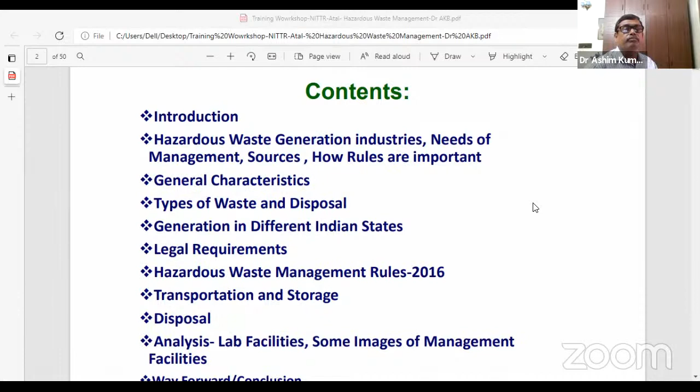Then the most important aspect is the legal requirements, because every industry must follow these legal requirements. Then the most latest hazardous waste management rules 2016 under MOEF. We'll discuss this rule, the basics of hazardous waste rules 2016. Actually it was generated in 1989 and the latest amendment was made in 2016.

Then transportation and storage, then disposal, and lab facilities required for characterization or analysis of the hazardous waste, then some real-life pictures of the management facilities—how the waste are managed, how the waste are transported. So some real-life images of the management facilities, then way forward with a conclusion. This will be our entire coverage with respect to my lecture on hazardous waste management.

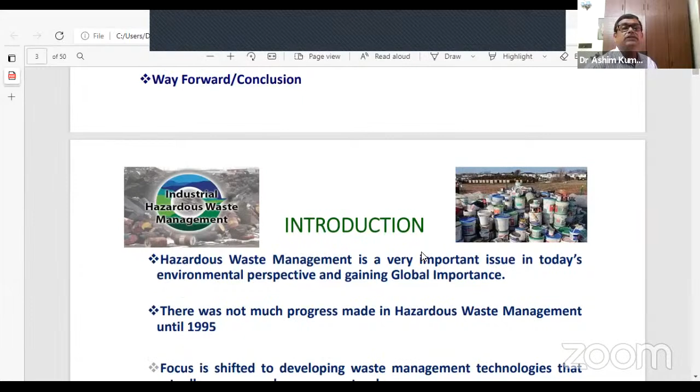In introduction, I just want to say that hazardous waste management is a very important issue in today's environmental perspective and is gaining global importance. This is a very important issue. And there was not much progress made until 1995. A rule was enacted in 1989, but not much progress was made with respect to hazardous waste management until 1995.

Focus then shifted to developing waste management technologies that are actually helpful to recover and conserve our natural resources, because the hazardous waste is creating a lot of problems with respect to conserving and protecting our natural resources. Without proper destruction or disposal, hazardous waste could be a major source of toxic pollution and a threat to our lives and the natural environment. So hazardous waste presents immediate or long-term risks to humans, animals, plants, and the environment as a whole.

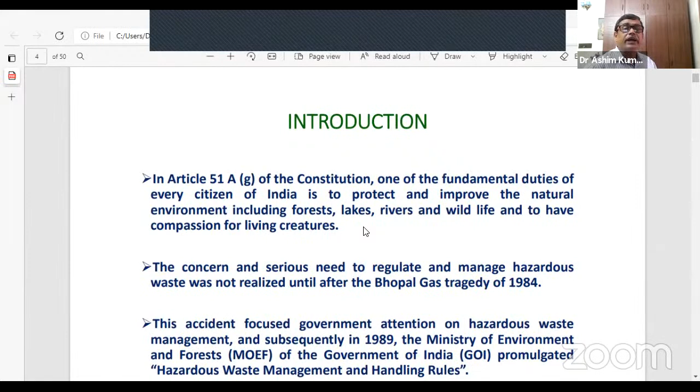Now, in Article 51A, Section G of the Constitution, one of the fundamental duties of every citizen of India is to protect and improve the natural environment, including forests, lakes, rivers, and wildlife, and to have compassion for living creatures. The concern and serious need to regulate and manage hazardous waste was not realized in Indian industry or Indian perspective until after the Bhopal gas tragedy.

All of you know about the Bhopal gas tragedy of 1984. After that, the hazardous waste management rules were enacted by the MOEF. After the Bhopal gas tragedy of 1984, this accident focused government attention on hazardous waste management, and subsequently in 1989 the Ministry of Environment and Forest of the Government of India promulgated the hazardous waste management and handling rules. So the concern and serious need to regulate and manage hazardous waste was not realized until this Bhopal gas tragedy occurred.

After that, the hazardous waste management rules were enacted by the MOEF, Government of India, as the hazardous waste management and handling rules. It was first enacted in 1989.

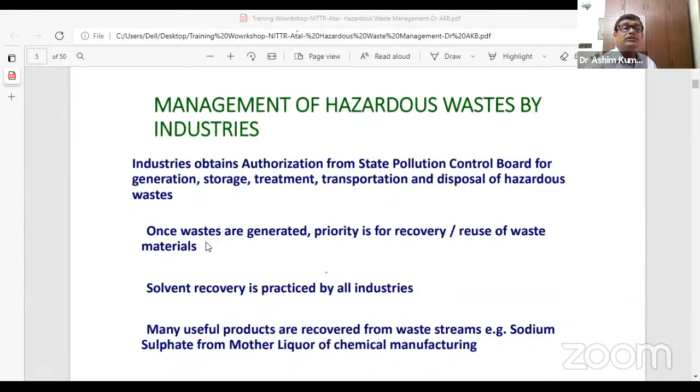Once waste is generated, priority is given to recovery and reuse of the waste material. Solvent recovery is practiced by almost all industries. So once waste is generated...

As per the new rules, and as guided in the waste management rules, the priority should be recovery and reuse of the waste material. This should be given top priority. First, you have to find out the recovery and reuse opportunity of the waste material.

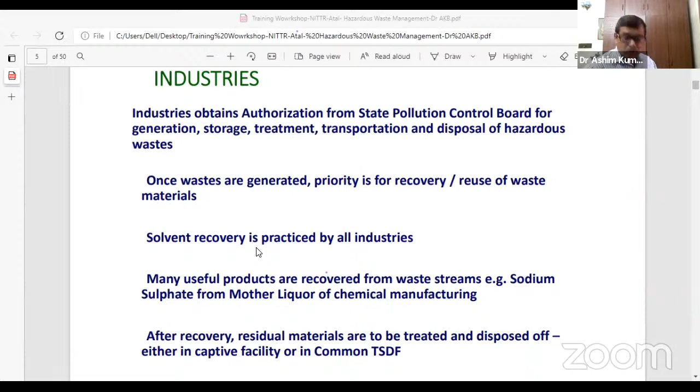Then solvent recovery is practiced by all industries, because otherwise solvents may create a lot of problems with respect to atmospheric pollution and wastewater contamination. That's why solvent recovery is another issue already practiced by many industries.

Many useful products have been found through research, and most industries are now looking for recovery due to environmental hazards and environmental concerns throughout the globe, not only in India. That's why research has focused on recovering resources. Resource recovery is a very important term now, whether it is liquid waste or solid waste. It is the major focus, and many useful products are recovered from waste streams.

For example, sodium sulfate from mother liquor of chemical manufacturing may be recovered. Recently, I am associated with a pharma industry near Kolkata, West Bengal, where I work as an advisor with respect to wastewater treatment facility and solid waste management.

So for this wastewater, they are planning for recycling. Apart from waste issues, water is now a big issue - water management, wastewater recycling. When wastewater is recycled, some solid waste is always generated. At the last stage, if the plant is looking for ZLD, zero liquid discharge, this concept has come up.

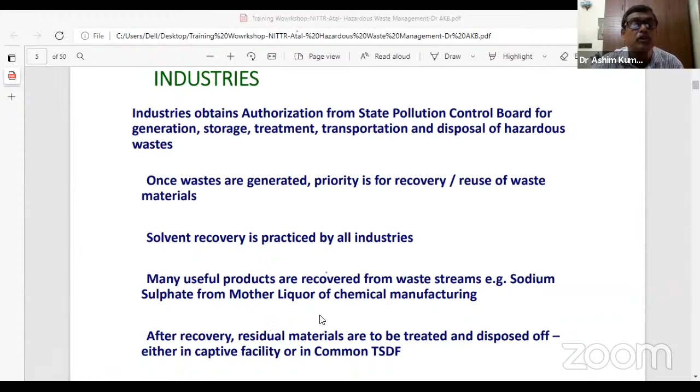After recovery, residual materials may remain, because I am sharing the sodium sulphate example, but in other industries this resource recovery may generate some other contaminants also. So after recovery, if residual contaminants are hazardous, characterization is most important. These residual matters then have to be treated and disposed as per common rules, either through a captive facility or a common TSDF, which means Treatment, Storage, Disposal Facility.

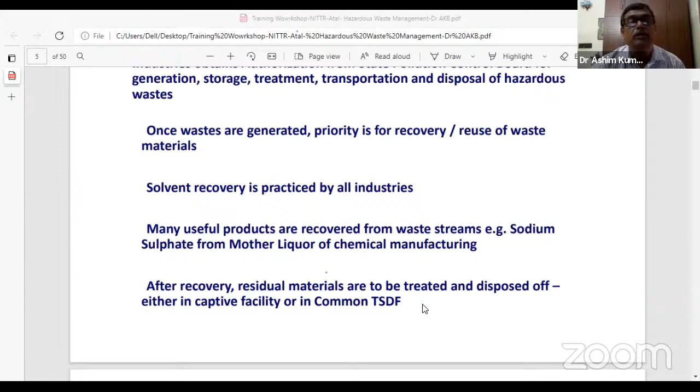So after recovery, why do we need to care for hazardous waste? These scenarios already exist - though rules have come up, very few are followed, and it is continuing. You can see illegal dumping, ETP failure of the effluent treatment plant due to poor operation and maintenance. Then throughout India, it is an issue of RO reject. RO reject - I am in the industry.

So from the industry forum, now it is jointly associated with various academic and research institutions also, with respect to technology development and collaborative research. We are also doing work with various ceramic institutes and other research institutes. RO reject - you know that all over India, RO reject is a big issue. RO reject contains high TDS and also generates a lot of waste. So RO reject - even in the ETP after recycling, the reject is being discharged.

So RO reject handling is a big issue - illegal dumping, ETP failure, RO reject - it can be minimized; that is a challenge. It can be further minimized by proper handling or optimization of water resources. And also for RO reject, if we go for a suitable evaporator or crystallizer, there is a possibility of resource recovery from there. But for that, work has to be done.

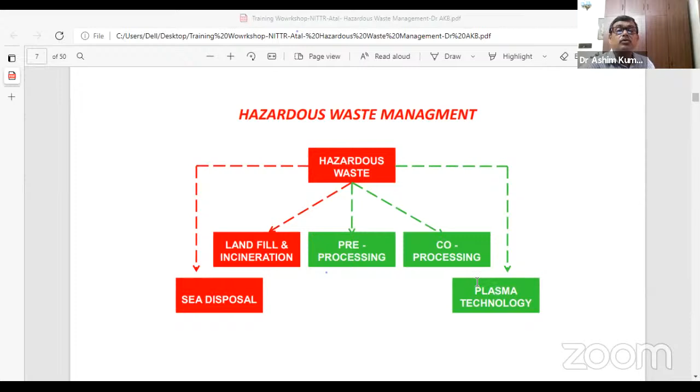Then co-processing - many hazardous wastes nowadays are co-processed with fly ash. Similarly, a lot of other hazardous waste is now co-processed in the cement industry. So: pre-processing, co-processing, and plasma technology. Plasma technology is based on thermal applications which create a lot of destruction of hazardous toxic components. So plasma technology, pre-processing, co-processing are some parts of hazardous waste management.

So now let us see what the possible sources are in an industry. If you see the entire diagram I have shared here, it will help you understand the possible sources of hazardous and other waste in an industrial facility. Our input materials in an industry - suppose raw materials, chemicals, additives, water, energy, etc.

These input materials are given to a production process. Once production is completed, we get the desired product, and sometimes we also get byproducts. So what are the generations? Some process residues are generated, which may be liquid and solid waste, or hazardous and non-hazardous waste.

So process residues may be of two types: one is liquid and solid waste, which may be hazardous or non-hazardous. Then from the production process, two parts emerge - one is the liquid, the wastewater going to the ETP. From the ETP, there are generally two types of sludge generated.

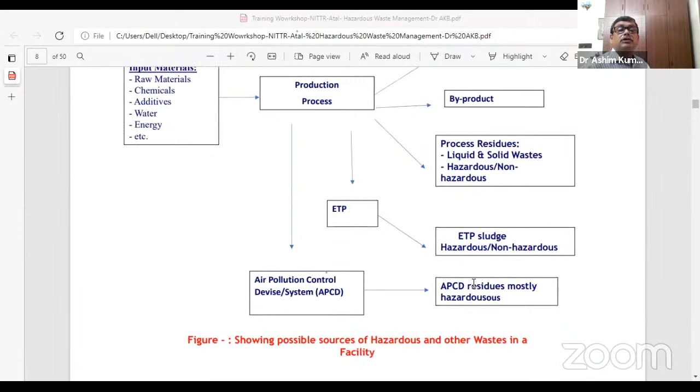So in most cases, these wastes are hazardous in nature. These are the various categories of sources of hazardous waste. Hazardous waste management is needed to prevent certain things from happening, and it is a basic requirement.

Otherwise, these things may happen: fire and explosion in landfills, because you don't know what solvents or hazardous chemicals may be there, which may react together and lead to fire and explosion. Then release of toxic chemicals from landfills, resulting in environmental pollution. These toxic chemicals may be metallic or non-metallic components, like cyanide or phenolic compounds.

Then there's export of hazardous waste from developed to developing nations like India, Africa, and Asian countries, which also creates a lot of problems. If proper management is done, this can be minimized, and intervention of international bodies like the United Nations can be avoided. Otherwise, if it reaches a great extent, the United Nations Environment Programme, or UNEP, may intervene.

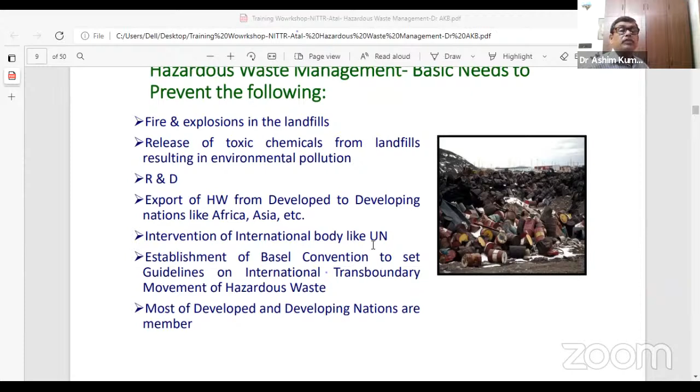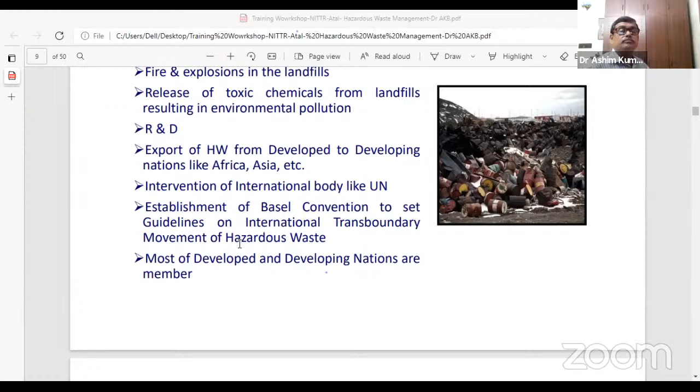This is very important: the establishment of the Basel Convention to set guidelines for international and transboundary movement of hazardous waste. Most developed and developing nations are members of the Basel Convention. So these are the basic needs to prevent the following.

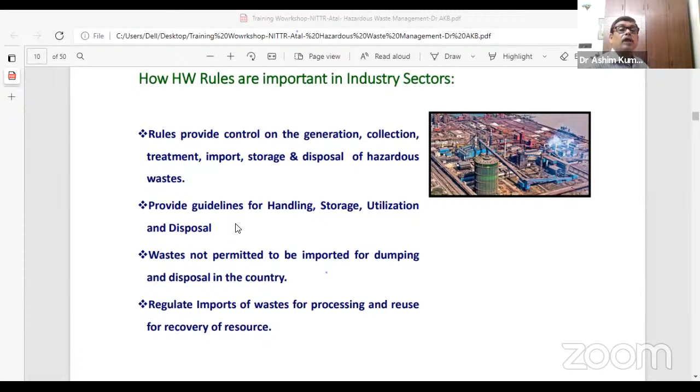Then, how are hazardous waste rules important in the industry sector? The rules help the industry control generation, collection, treatment, import, storage, and disposal. All these areas can be controlled by the industry for management of hazardous waste. The rules provide guidelines for handling, storage, utilization, and disposal.

Waste is not permitted to be imported for dumping and disposal in the country - this is now highly and strongly restricted. Imports of waste are regulated for processing and reuse for recovery of resources. Some waste can be imported for processing or resource recovery, but there should be some regulation, so that mismanagement does not occur. Sometimes co-processing or pre-processing may occur, but regulation needs to be there.

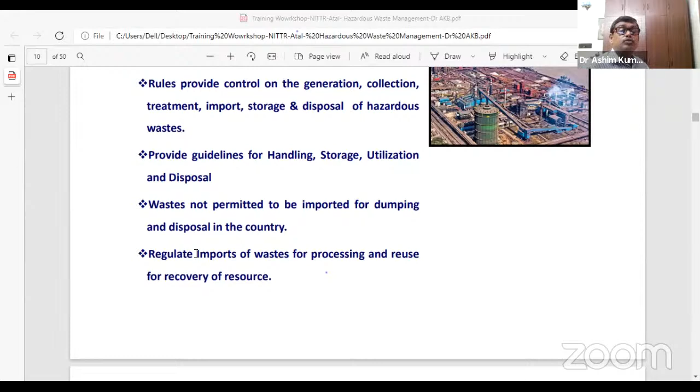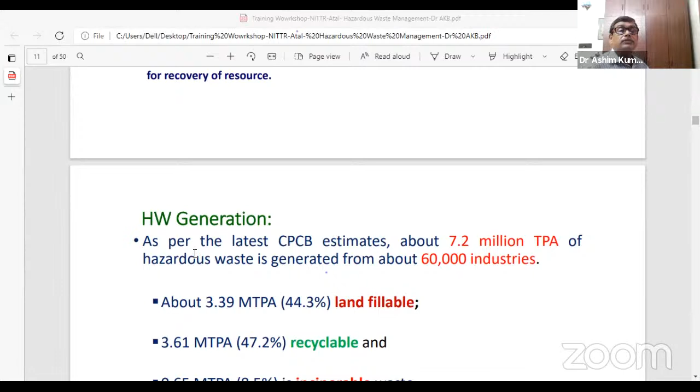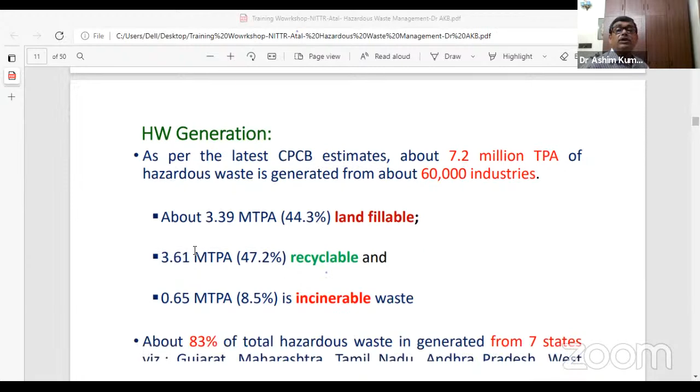So, let us see the typical hazardous waste generation picture in the country. As per the latest CPCB estimates, about 7.2 million tons per annum of hazardous waste is generated in the country from about 60,000 industries. Out of this, about 3.39 million tons per annum, 44.3% are landfillable, 47.2% are recyclable, and the remaining 8.5% is incinerable waste. This is the waste generation data from studies and estimates carried out by the Central Pollution Control Board.

About 83% of the total hazardous waste is generated from 7 major states: Gujarat, Maharashtra, Tamil Nadu, Andhra Pradesh, West Bengal, and Chhattisgarh. These 7 states contribute 83% of the total hazardous waste. And what are the facilities? About 29 common secured landfill facilities are there in 16 states.

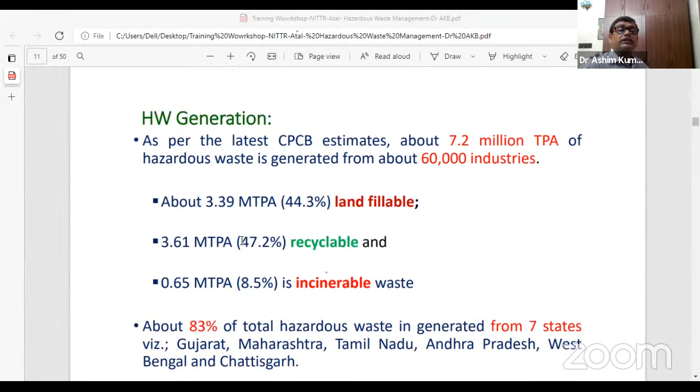In 16 states, around 29 common secured landfill facilities are there, and 14 common incinerators in more than 7 states. This is the hazardous waste generation estimate carried out by the Central Pollution Control Board under MOEF, which gives some idea of the generation.

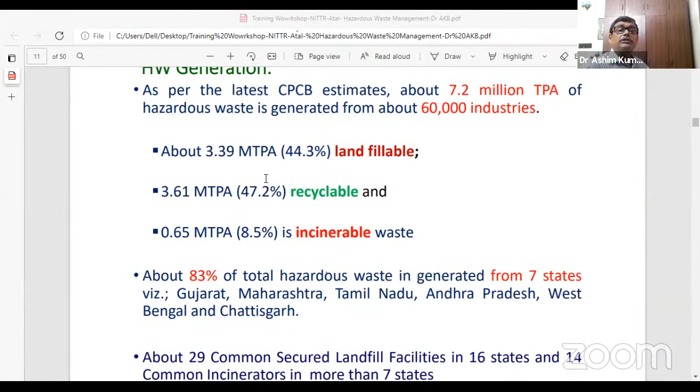Now let us see the general characteristics of the hazardous waste. Hazardous waste is mostly generated. After that, we'll see what the rules state, what are the components of the hazardous waste, and which waste we call hazardous waste.

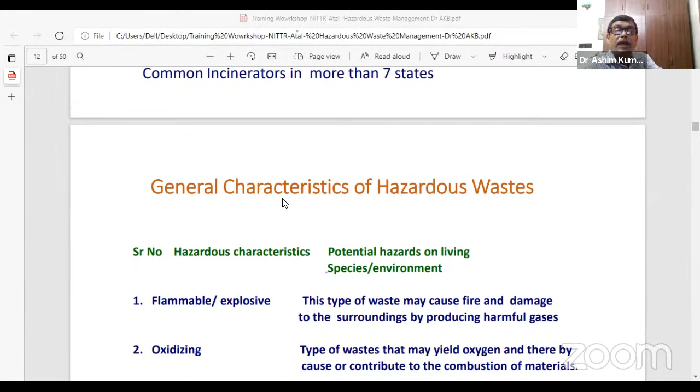This we'll discuss in the rules. We will come to know what waste we call hazardous waste, which are included and which are not included. This is also applied in the new rules 2016 that we will share.

See the hazardous waste characteristics and the potential hazards on living species and the environment. This explains the characteristics of hazardous waste with respect to its hazardous nature and corresponding effect on the environment. One type of hazardous waste may be flammable or explosive type.

The petrochemical industry may generate hazardous waste which is mostly flammable in nature, such as solvent extraction plants, the petrochemical industry, and refinery petrochemicals.

Then explosive type, like in Indian Explosive Limited, various explosive producing companies may be there, which may also produce hazardous waste. Nitrate based explosives are there. Some organizations have around 3-4 plants producing some explosives.

Detonators, used in hilly places for charging during road construction purposes, may generate hazardous waste after generation. This type of waste may cause fire and damage to the surroundings by producing harmful gases.

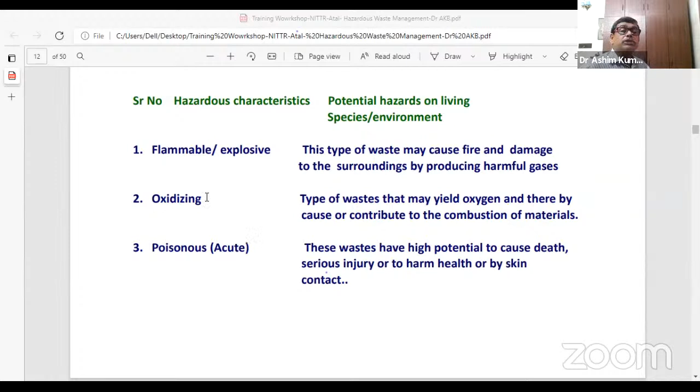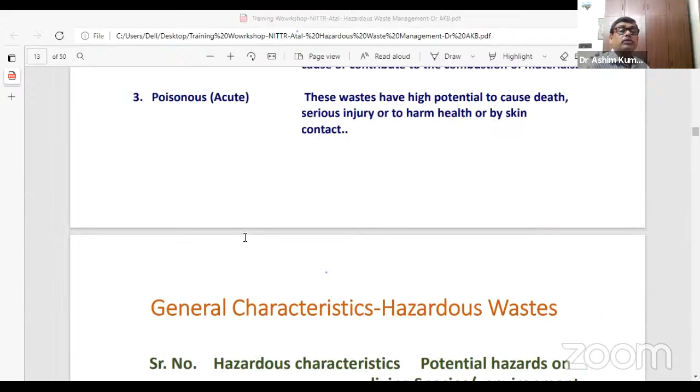Let us see what other characteristics are possible with respect to hazardous waste. It may be infectious, as we call it poisonous, then it may be infectious also - hazardous waste containing microorganisms.

When poisonous, it may be due to the presence of toxic chemicals. Due to toxic chemicals, in most cases it causes poisonousness or injury to health or through skin contact. Now, if it is an infectious substance, it is mostly due to harmful microorganisms present, and it may sometimes be very difficult to understand the health effect.

This hazardous waste contains microorganisms and toxins responsible for disease in humans and animals. That's why often even doctors are sometimes unable to diagnose a particular patient suffering from infectious substances.

Think about people who are directly exposed to this hazardous waste while handling it. If it is infectious, he may form a disease and get admitted to the hospital. Even with a lot of experiments - X-ray, colonoscopy, entire body scanning - the doctor understands some infection is there, but the diagnosis is very difficult, unknown, and ultimately it may lead to death.

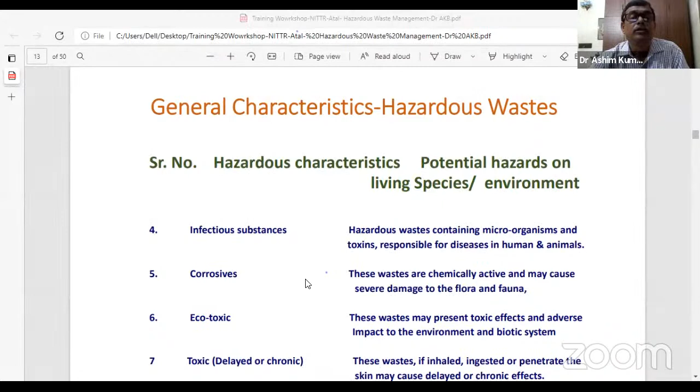Then there may be corrosive waste also. These wastes are chemically active and may cause severe damage to flora and fauna if they are corrosive. If it is a hazardous waste which is corrosive in nature, during rainfall it may leach into the soil. This affects the soil structure, agriculture, and the entire soil in that area, making it ineffective. Even if the dumping site is changed, due to leaching and corrosivity the soil becomes unfertile if it is corrosive type.

Not only does the waste affect the flora and fauna near the soil, but if it leaches out, it may severely affect the ecosystem. It may disturb the natural dynamic equilibrium of the ecosystem.

This is called ecotoxic. This waste may present toxic effects and adverse effects on the environment, disturbing the natural dynamic equilibrium of the ecosystem. Then there is toxic, delayed or chronic, slow effect.

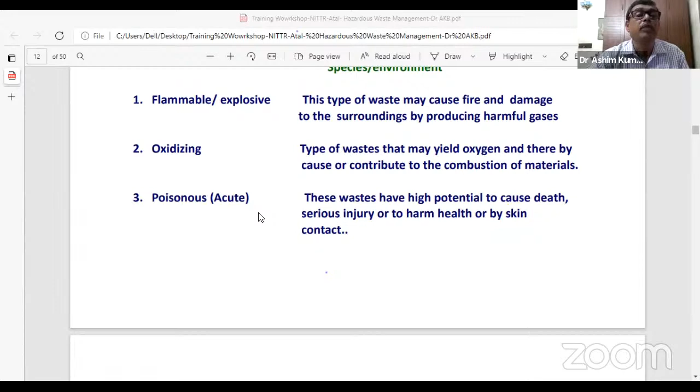So these are the various characteristics of hazardous waste I have explained, covering almost all categories: infectious, corrosive, ecotoxic, toxic, delayed or chronic, and also poisonous, oxidizing, flammable and explosive. As per rules, these are all included in the general characteristics and their effect on the environment.

Now let me share some types of waste and their possible disposal methods, depending on the industry and source. For example, spent organic solvents from bulk drugs companies have to be disposed of through incineration. But for incineration, you have to follow the hazardous waste rule guidelines. There are specific rules and specifications for the incinerator. Later, I will share details on the height of the incinerator and design aspects depending on the solvent.

Then there is off-specification product. This means after a product is produced, it goes to the quality control lab for testing as per specification. After analysis, if QC rejects the product, that is called off-specification. The rejection occurs because the product fails to meet the specification, even though production has been completed. This is declared by the quality control department of the industry, and this waste also generally goes for incineration.

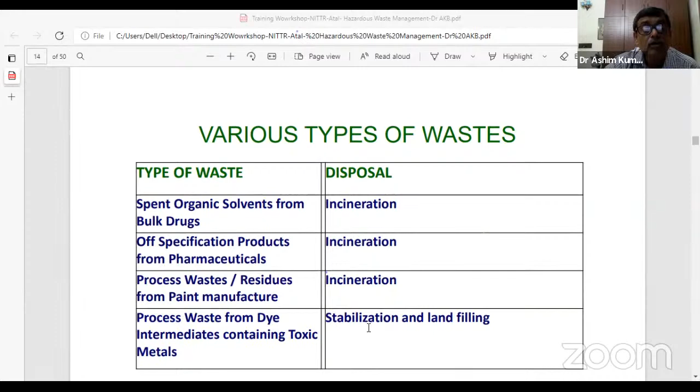Process waste from dye intermediates containing toxic metals generally goes for stabilization and landfilling. And then there is ETP sludge - I have already shared the possible sources of ETP sludge - which generally goes to a transport, storage, disposal facility for landfilling.

Used oil is sold to a CPCB registered recycler. Some oil is used for various applications like lubricating purposes in workshop machinery. After use, this waste oil has to be managed - there are companies who take the used oil for recycling as hazardous waste. It has to be sold only to an authority that is enlisted under MOEF or the Central Pollution Control Board as a registered recycler; you cannot sell it to any other authority.

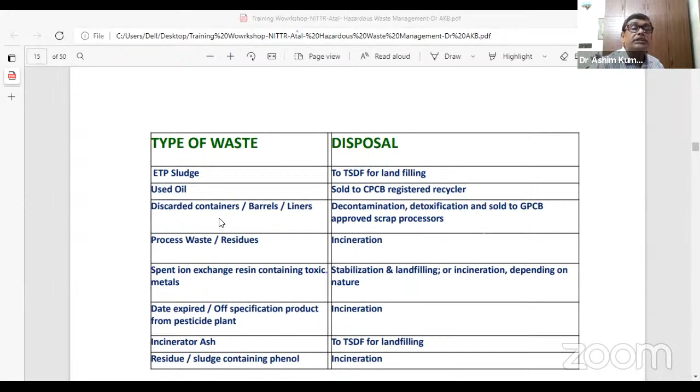So discarded containers, barrels, liners, after decontamination and detoxification, are sold to GPCB approved scrap processors. Then the process waste residues may go for incineration.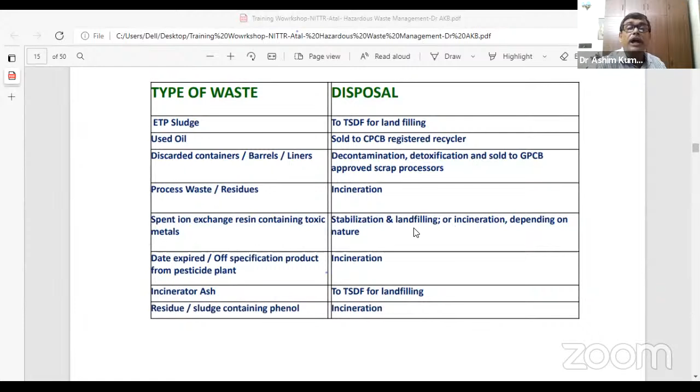So if date expired or out of specification, as already explained, it goes for incineration. After incineration, some ash is generated, and that ash again goes to TSDF, that is the treatment, storage, disposal facility, for landfilling. Incinerated ash going to TSDF for landfilling, I am just sharing one thing.

Nowadays briquette is used in many boilers. In an industry, boiler is used for steam generation purpose. In small and medium scale boilers, generally fossil fuel is used. What are the fossil fuels? Either diesel, HHD, or coal.

Now all these are considered not at all a green fuel. They are polluting fuels. Once we burn coal, what emissions may occur? Sulfur, SOx, NOx, carbon emissions. Also the ash generated from HHD or coal may contain toxic metals, toxic elements. The sludge is highly hazardous.

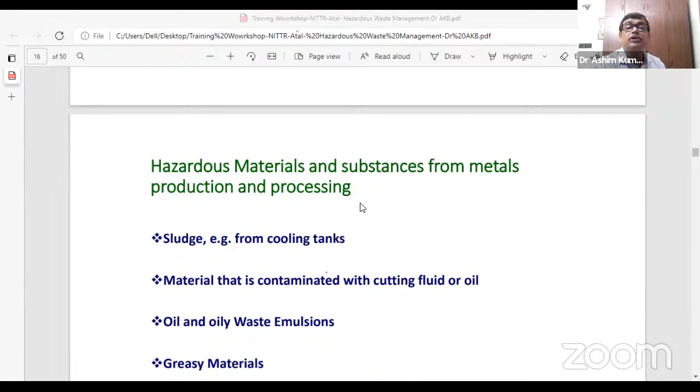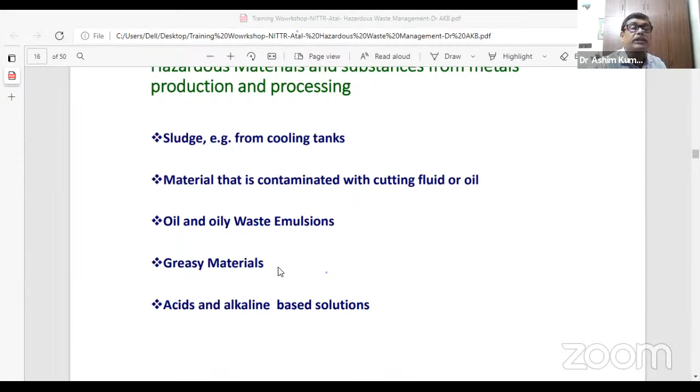Now looking at hazardous materials and substances from metal production and processing. In a metal processing plant, possible wastes generated include sludge from cooling tanks, material contaminated with cutting fluid or oil, oily waste emulsion, greasy material, and acid and alkali-based solutions. These are possible sources of hazardous materials from metal processing industries, along with solvent used for degreasing scrap and cleaning boilers.

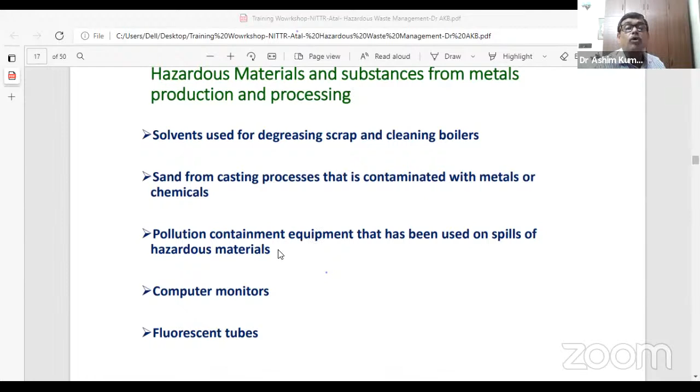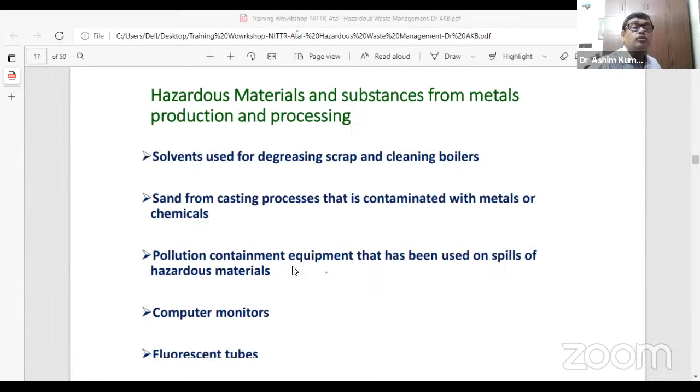Sand from casting process that is contaminated with metals or chemicals - this is from the sandblasting or casting process - may generate hazardous waste. Then pollution containment equipment that has been used on spills of hazardous material also becomes hazardous. These also become hazardous waste because they contain analysis equipment, computer monitors, fluorescent tubes - these are other parts of hazardous waste. With respect to these last two, not only metal processing, but any industry can generate this.

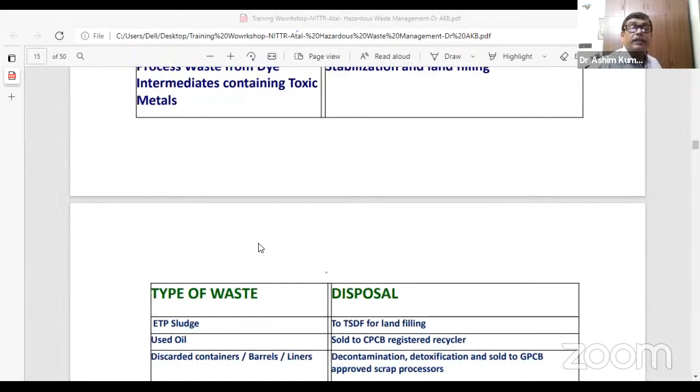Now comes the legal requirements. We have explained the various characteristics of hazardous waste, the hazardous waste scenario, the possible disposal methods, and the generation of the waste. Now let's discuss the legal requirements.

The Ministry of Environment and Forest, Government of India, notified the Hazardous Waste Rules on July 28, 1989, under the provisions of the Environment Protection Act 1986, which was further amended in the years 2000 and 2003. So these legal aspects are there, and any industry has to follow them.

Then the Hazardous Waste Rules 2008 were notified for effective management of hazardous waste, which do not come under the purview of the Prevention and Control of Pollution Act 1974, the Water Act, and the Air Act. So this is a separate set of rules from 2008.

And lastly, the final Hazardous Waste Management Rule 2016 was published in the Gazette of India, Extraordinary, Part 2, Section 3, Subsection 1, by the Government of India, Ministry of Environment, Forest and Climate Change, New Delhi, on 4th April 2016. This is the last amendment to the hazardous waste management rules.

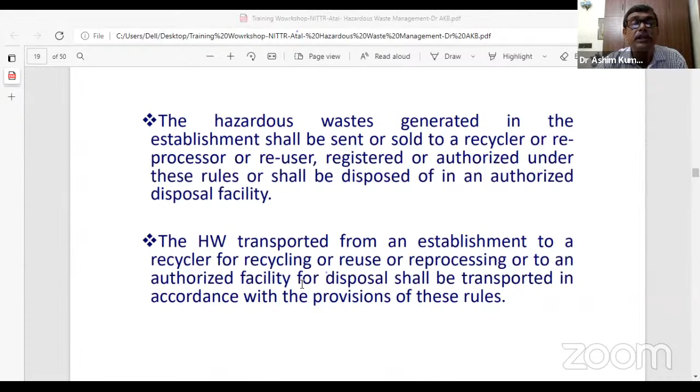The hazardous waste transported from an establishment to a recycler, for reuse, reprocessing, or to an authorized facility for disposal, shall be transported in accordance with the provisions of this rule.

The high volume, low effect waste, such as fly ash - high volume, low effect means in a power plant, a large amount of fly ash is generated, but compared to other hazardous waste like in chemical processing or petrochemical industries, the waste generated there is much more hazardous than fly ash. So it's called high volume, low effect, since its hazard level is not as high even though the quantity is. Then there's phosphor gypsum and red mud.

Phosphor gypsum is generally generated in fertilizer industries, phosphate-based fertilizer. If you visit Paradip, you can see two industries there - one is IFFCO, earlier Oswal Fertilizer, two fertilizer plants. One is Paradip Phosphate, where you can see the gypsum bed - after processing, gypsum is the solid waste generated.

Then there's red mud, which is generated generally from the alumina industry, from bauxite to alumina processing. Then slag from pyrometallurgical operations, and mine tailings from chromium mines, coal mines - lots of tailings are there. Tailings means after processing, the waste is kept as a slurry in a pond-like area, a tailing pond.

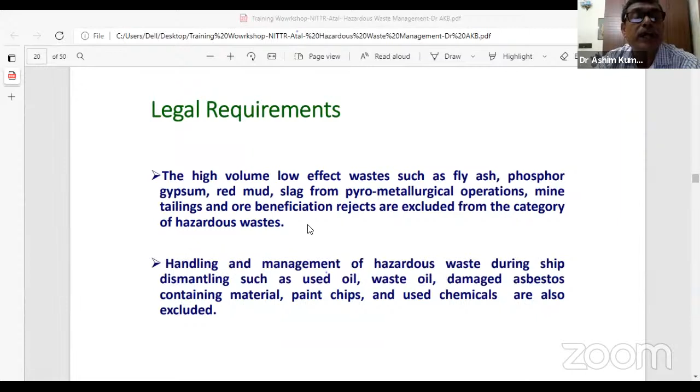Handling and management of hazardous waste during ship dismantling, such as used oil, waste oil, damaged asbestos containing material, paint chips, and used chemicals, are also excluded. These come under separate waste management rules.

So in terms of hazardous waste rules, let us see which waste we call hazardous waste. Rule 3(1) means any waste that has physical, chemical, reactive, toxic, flammable, explosive or corrosive characteristics and is likely to cause danger to health or the environment, whether alone or in contact with other wastes or substances, and that includes waste having constituents specified in Schedule 2.

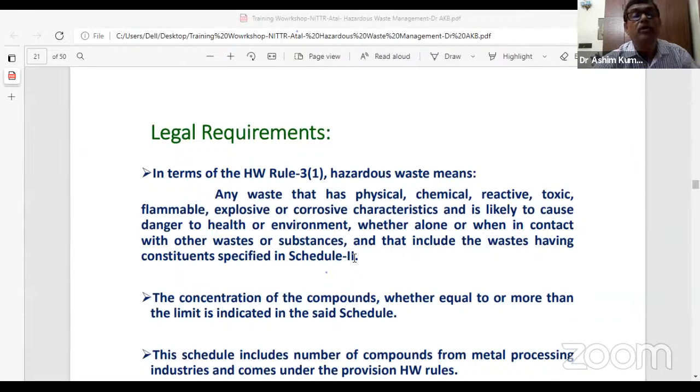So there is a Schedule 2 in the hazardous waste management rules which gives specifications of what the waste is. Actually, a lot of it is biomedical waste, and there is a separate set of rules for biomedical waste management. There is a lot of diversification and classification, but since time is short, we cannot explain it all here.

You can go through the hazardous waste management rules yourself. Just to give you an idea, in Schedule 2 you can find the total constituents specified. The rules are available and you can directly download them from the website and see the Schedule 2 part.

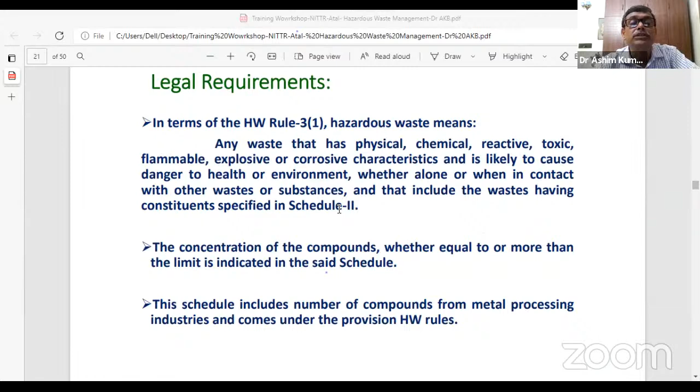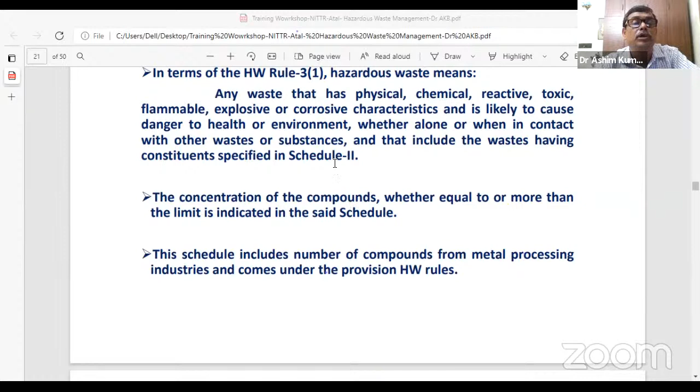The concentration of the compounds equal to or more than the limit indicated is specified in the schedule. What is the limit and what is the concentration of the various compounds is also maintained in the schedule. This schedule includes a number of compounds from metal processing industries that come under the provisions of the hazardous waste rules.

Now comes the Basel Convention, on the control of transboundary movements of hazardous waste and their disposal, usually known as the Basel Convention. It is an international treaty designed to reduce the movement of hazardous waste between nations, and specifically to prevent the transfer of hazardous waste from developed to less developed nations.

Otherwise, most countries are exporting or importing waste, and developed countries generally try to dispose of scrap to developing nations. That's why this international treaty was signed under the Basel Convention. It was opened for signature on 22nd March 1989 and entered into force on 5th May 1992.

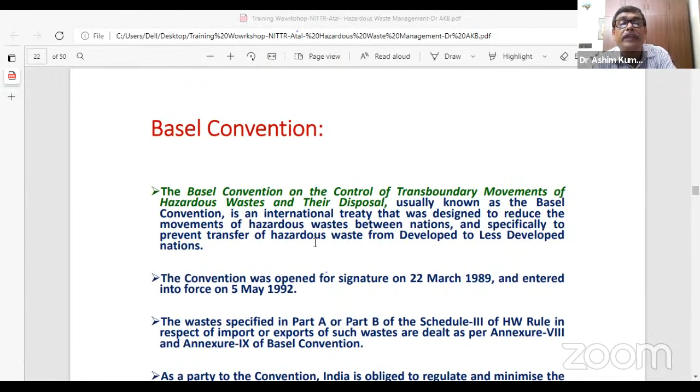The waste specified in Part A or Part B of Schedule 3 of the Hazardous Waste Rules, with respect to import and export of such waste, are dealt with as per the annexure - Annexure 8 and Annexure 9 of the Basel Convention. These are just for your awareness.

As a party to the convention, India is also a member. The Basel Convention mostly relates to import-export or transboundary movement, from one country to another, as an international treaty. So India is obliged to regulate and minimize the import of hazardous waste or other waste for disposal or recycling.

Nowadays many plants recycle and produce a lot of good products. Some industries in other countries produce raw materials which are now being recycled. Various plastics are converted into useful products, like plastic bottles. There is a plant near our area in Kolkata where they use waste plastic bottles and convert them into synthetic cotton.

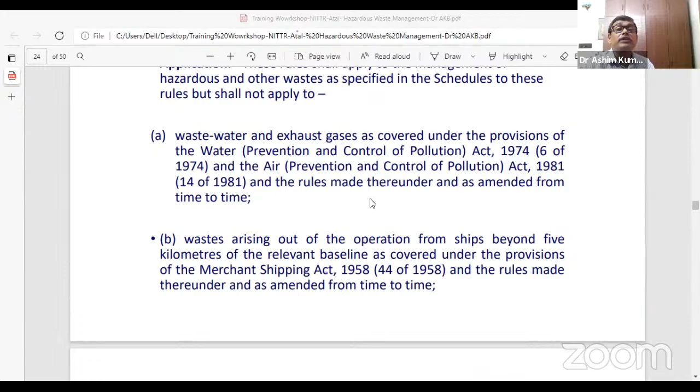Waste arising from operations of ships beyond 5 kilometers of the relevant baseline is covered under a separate act, the Merchant Shipping Act 1958, and its rules, so these are not included in the hazardous waste management rule. Similarly, radioactive waste, you may say it is also hazardous, but there is a separate act for that, the Atomic Energy Act 1962. So these are hazardous, but under a different act, not included in the hazardous waste act.

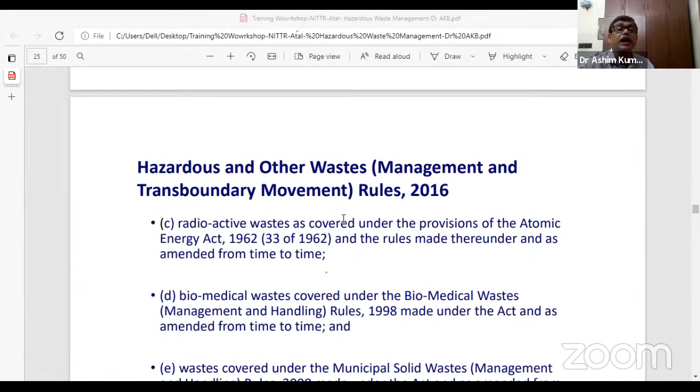Then biomedical waste, including municipal solid waste. Till now, anybody may think, what about municipal solid waste? Because municipal solid waste also generates a lot of hazardous waste. Some recovery is there, composting may be there, but other parts have a lot of hazardous content. So it is under separate rules, the Municipal Solid Waste Rules 2000, made under the act and as amended from time to time.

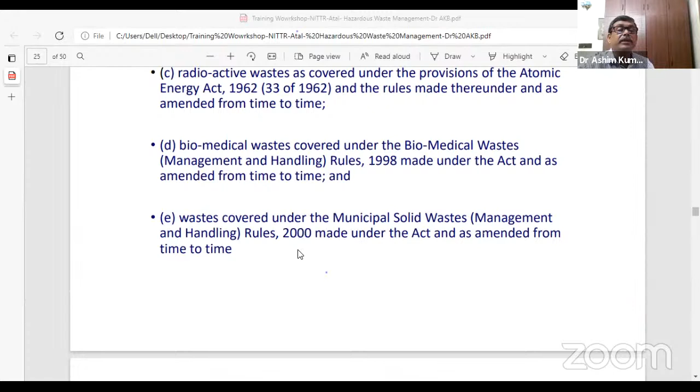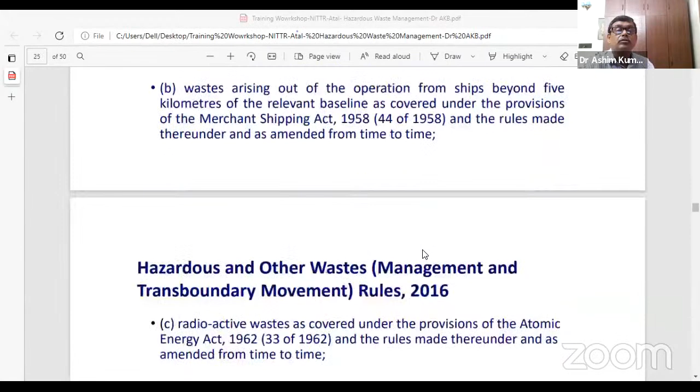So radioactive waste, biomedical waste, municipal waste, shipping act, water, wastewater, air, these are enacted in separate acts and are not included in the hazardous waste management rule. This is just for your information and knowledge, to have an idea of what actually falls under hazardous waste.

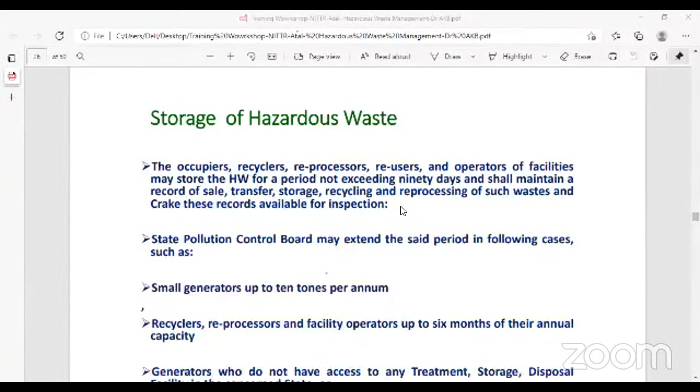So, storage of hazardous waste. The occupiers, recyclers, reprocessors, reusers, and operators of facilities may store the hazardous waste for a period not exceeding 90 days. In storage, how much storage, that is also included in the guideline, not more than 90 days, and they shall maintain a record of sale, transfer, storage, and proper documentation should be there.

In a plant, that means you cannot store for more than 90 days as per the rules. You have to keep a record of sales, transfer, storage, and recycling. How much, if you are recycling, going for reprocessing, every stage you have to record it.

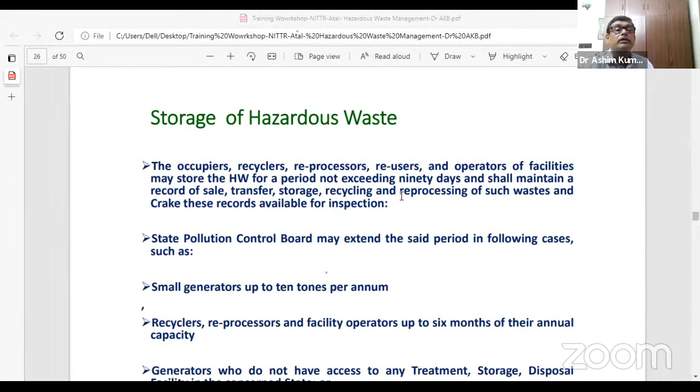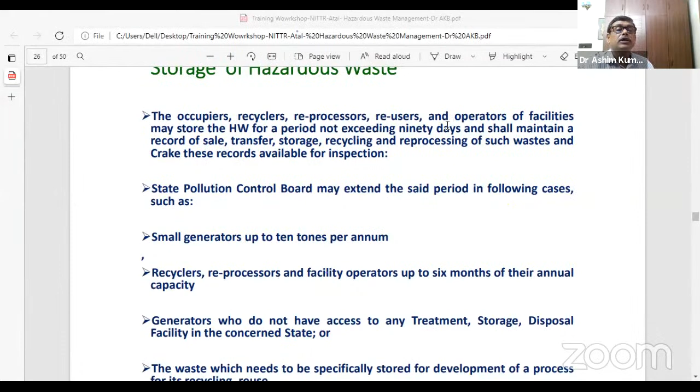The State Pollution Control Board may extend the said 90-day period in certain cases, such as for small generators generating up to 10 tons per annum, the storage may be extended beyond 90 days. For recyclers, reprocessors, and facility operators, up to 6 months of their annual capacity, in that case storage for the recycling plant may run up to 6 months.

Storage can be extended for more than 90 days for generators who do not have access to any treatment, storage, or disposal facility in their state. Suppose in a state like Jharkhand or Bihar, which does not have any facility to take that sludge or storage facility, then it can be stored for more than 90 days.

Let me give you an example. Sikkim has a lot of pharma industries, and I have already told you Sikkim is a green state. But whatever storage is needed for the generation there, Sikkim does not have any storage facility. They have to use the storage facility of the West Bengal Pollution Control Board, which has three facilities: Siliguri, Haldia, and Durgapur. So Sikkim doesn't have any facility of its own.

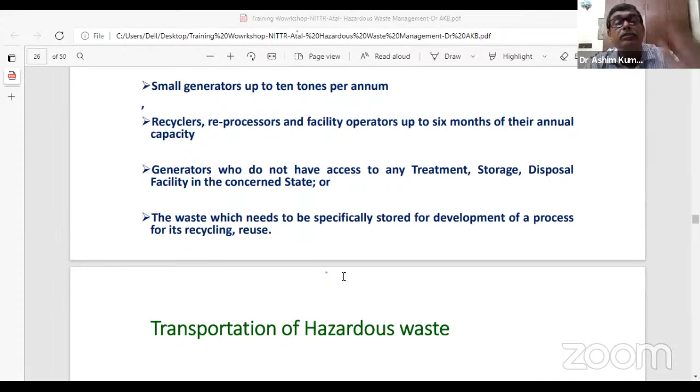So in that case, they may go for more than 90 days. Just to share a real example, because they have to take the facility of West Bengal, their disposal may be allowed beyond 90 days. But they have to take written consent from the State Pollution Control Board.

The waste which needs to be specifically stored for development of a process, recycling, or reuse—sometimes the waste has value and they are planning to recycle it, specifically stored for development of the process. Suppose some research is going on, they are doing inbuilt research for recycling or reuse purposes. In that case, everything has to be declared to the State Pollution Control Board and consent has to be taken from them.

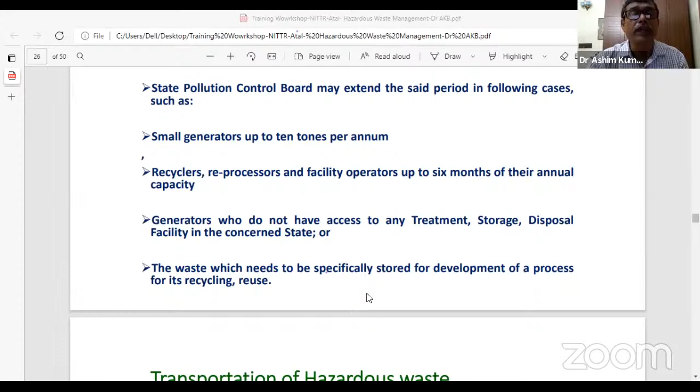Now, transportation of hazardous waste. The transport of hazardous waste should be in accordance with rules by the central government under the Motor Vehicle Acts, because transport comes under the Motor Vehicle Acts and other guidelines. The processor shall provide the transporter with relevant information regarding the nature of the hazardous waste as per Form 11, and measures to be taken in case of emergency, and shall mark the hazardous waste container as per Form 12.

In case of transport of hazardous waste to a final disposal facility for treatment, storage, and disposal existing in a state other than the state where the hazardous waste is generated, the processor shall obtain a no objection certificate from the State Pollution Control Board of both states, which I have already explained.

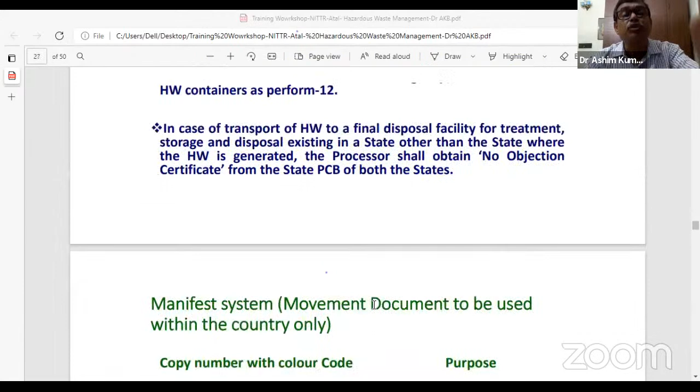Now, during transportation and storage, various types of forms are used with a color code. This is the practice actually followed by the industry. There are white, yellow, pink, orange, green, and blue forms—six colors in total.

This manifest movement document is to be used within the country. During transportation and storage, these forms have to be applied, and it is clearly specified which color form has to be kept for record purposes. The white form is to be forwarded by the processor to the State Pollution Control Board committee.

The yellow form is to be carried by the processor who is taking the sludge for processing purposes. The pink form is to be retained by the operator of the facility after signature. The orange form is to be returned to the transporter by the operator of the facility.

So these are the various forms used for recording purposes. As per the rules, these various colors of forms are generated as part of the manifest system movement document for record purposes. The green form is to be retained by the operator of the facility and sent to the State Pollution Control Board committee after treatment and disposal, and the blue form is to be returned by the operator of the facility to the processor after treatment and disposal of the hazardous waste. These are the manifest color codes with respect to handling, and their application during the movement of hazardous waste.

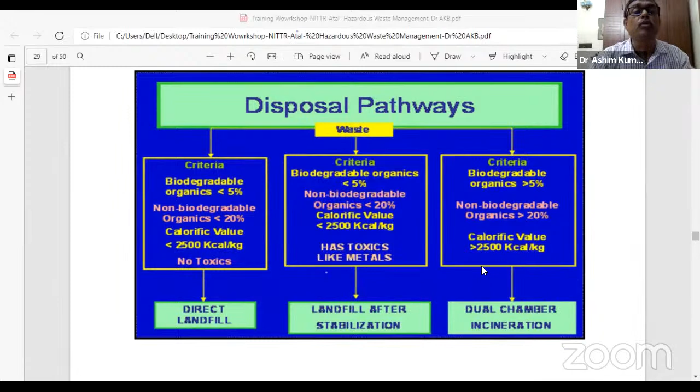So these are the disposal pathways based on the characterization of the hazardous waste. For characterization of hazardous waste, you need a very good laboratory. These are some equipment and facilities required.

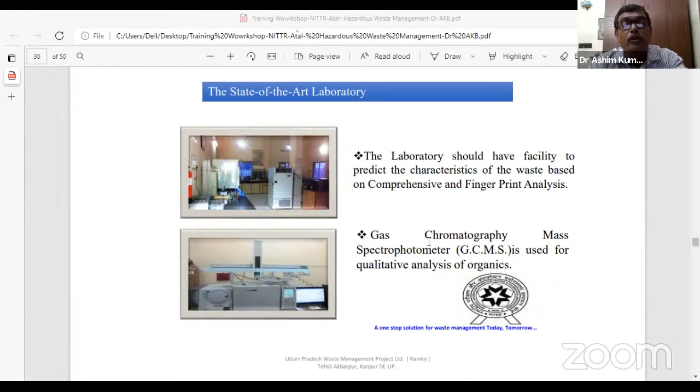You can see gas chromatography, mass spectrometer, useful for qualitative analysis of various organic toxic components, then atomic absorption spectrophotometer, as I mentioned, for toxic metal analysis, and elemental analysis like carbon, hydrogen, nitrogen analyzer. These are some instruments and facilities in a state-of-art laboratory containing this type of analytical instruments for characterization.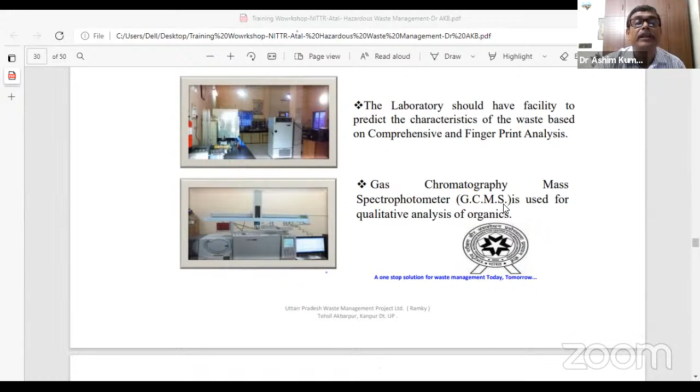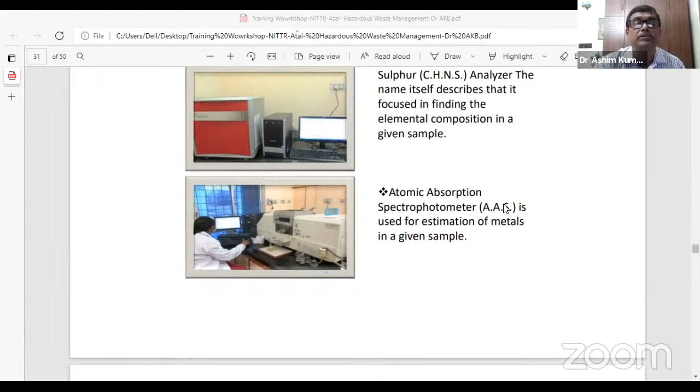Because only after characterization can you follow the guidelines on what to do, either landfill or other disposal pathways. So these are the analysis requirements.

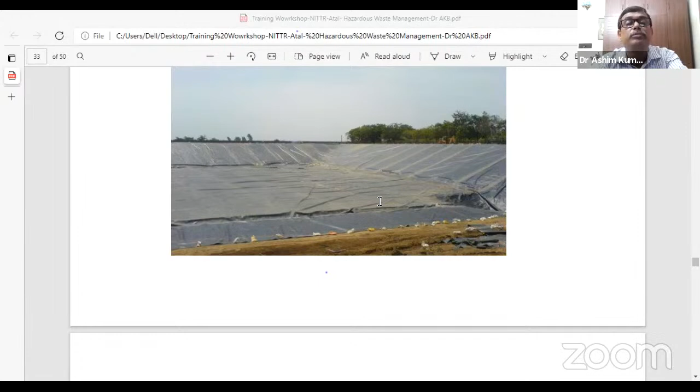And now I am showing some real life images of the facilities. You can see these are images of facilities designed so there will be no leaching. These facilities have to be built for transport, storage, disposal, and the storage phase.

These are for transportation purposes. It is a real life picture. You can see this is hazardous waste going on.

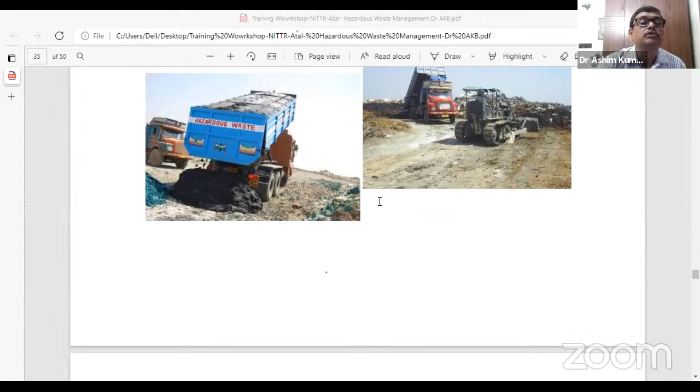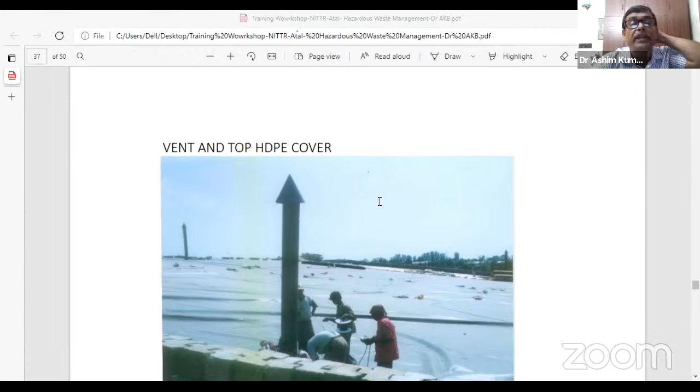You can see the soil layers spreading and compaction of the waste, and vents, because sometimes gases are released, that's why this type of vent is also made, and the site is covered during the monsoon period, so that during the monsoon you can see the site is covered. This type of coverage has to be done, so a lot of management aspects are involved.

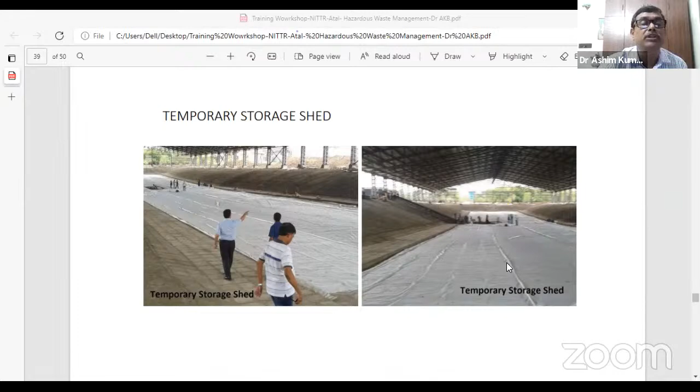You can see a temporary storage shed also sometimes has to be built. This is also a temporary storage area shed, so that there is no washing and spillage during the monsoon period. And there is a weigh bridge also, to calculate the amount, as I mentioned in the document movement and manifest system, weigh bridge and sampling are required.

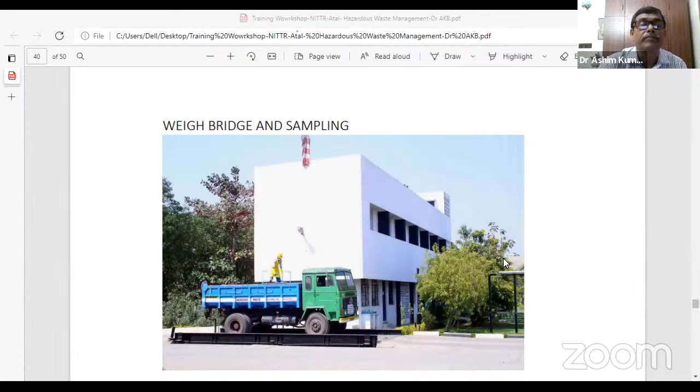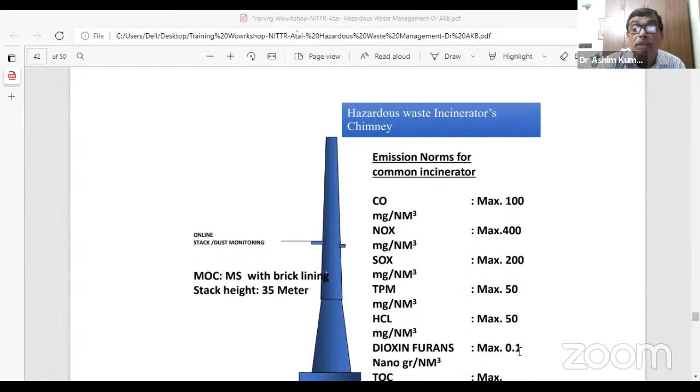These are the acidic part, dioxin and furan only 0.1, and total organic carbon maximum 20 milligrams. So these are some norms, emission norms of the common incinerator, and the height of the chimney should be around 35 meters.

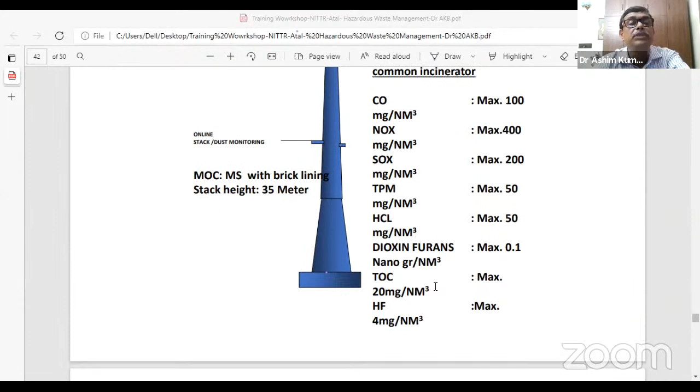You can see in Jamshedpur area, near Tata Steel, which was initially slag based. Now it is converted to a green park. If anybody has visited Tata Steel in Jamshedpur, there is a huge hilly area filled with slag from that steel plant. Now it is covered with a green park. So after the completion of the filling, it can be converted to this type of facility also.

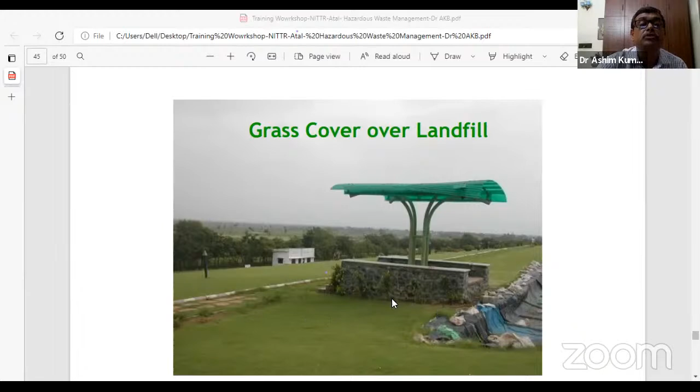Grass cover over landfill. Vegetable cover, various types of vegetation, this type of grass coverage is also possible. This should be a very good practice, an innovative approach of hazardous waste management.

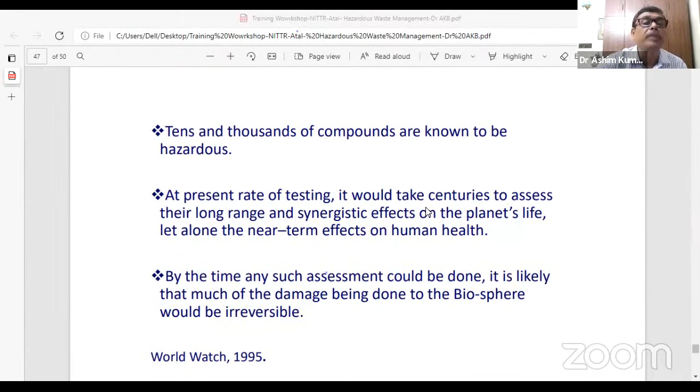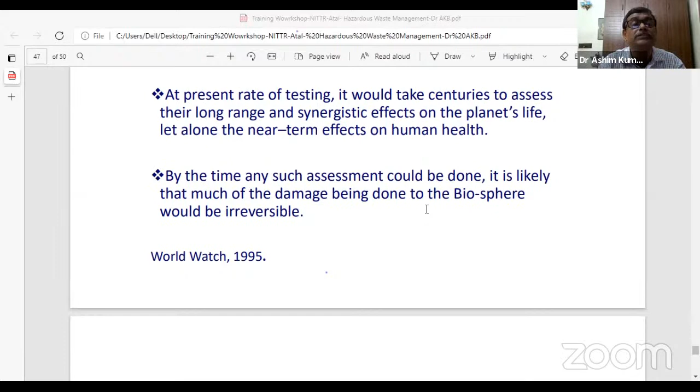Thousands of compounds are known to be hazardous. At the present rate of testing, it would take centuries to assess their long-range synergistic effects, because total analysis is needed for proper management. It is likely that much of the damage being done to the biosphere would be irreversible, affecting not just planet's life but near-term human health. That's why the full analysis needs to be done, but at the same time management practices have to be implemented very sincerely and strongly for a successful result.

So with this, I thank you. The last thing I want to say is the earth provides enough to satisfy man's need, but by generating hazardous waste, not for every man's greed. So let us join hands to fight against this pollution with a sustainable and innovative approach. Thank you, thank you all.